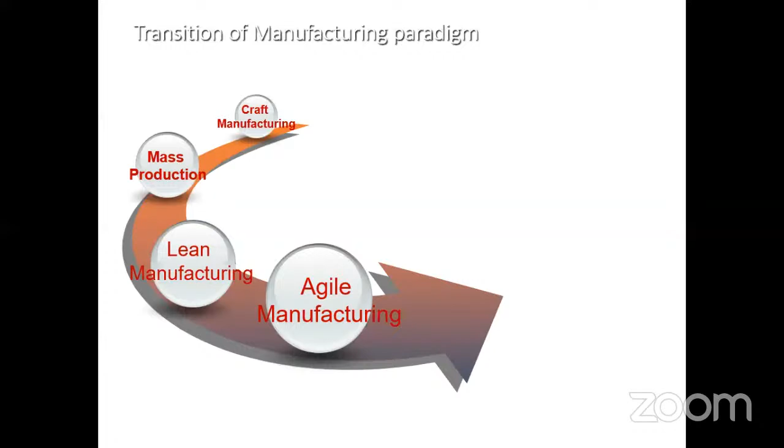Further moving ahead, let us try to see the comparison between a craft system, mass system, and lean system. The focus of the craft system is more on the task or the activity. Whereas moving ahead with mass production, the focus is on manufacturing the product, mass manufacture of similar products. Whereas from a lean perspective, the customer is the focus - customer thought, customer value is more important.

Coming to the operations, most likely in a craft system we don't have more items or more variants. We may operate with limited variants, trying to produce in line with the requirements. But in the mass production system, we have the batch and queue scenario because the products are getting accumulated - it will have a batch and queue scenario.

Next comes the lean system, where the focus is on synchronizing the flow and pull. Synchronizing the flow means the processes have to be synchronized as a part of it - one process and the next process have to be synchronized and streamlined so that the product flow will be smooth. And it is based on pull - the lean system works purely based on customer demand. We try to produce to the customer demand; it's based on the concept of the pull system.

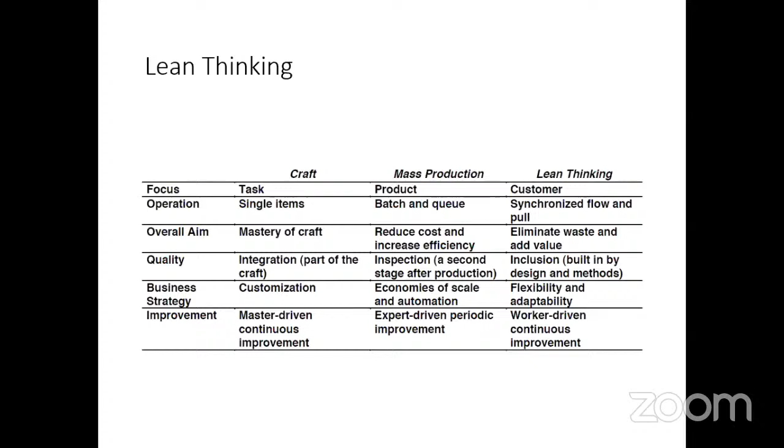Now if you see the industry's concerns, one perspective is government policies, because government policies help us make certain changes. With regard to lean manufacturing, the Ministry of Micro, Small and Medium Enterprises had a policy called the Lean Manufacturing Competitiveness Scheme, LMCS, wherein they provided grants for industries to implement lean manufacturing, even small scale industries. Many small scale industries have adopted it.

We were involved in some cluster-based projects as part of this LMCS, wherein small scale industries as a cluster, maybe 5 to 10 industries, are put together. When they form a cluster, they can submit a proposal to the MSME ministry, and accordingly get a grant. The ministry can provide about 70 to 80% of the project cost, and the remaining 20% the respective industry has to take up. Likewise, government policies are bringing about changes in manufacturing systems.

Next comes global competition, because the competition is at a very large scale, and the intensity of competition is increasing. We have numerous players for the same product, not only at the national level but also globally. We have numerous international players for the products. Next, the organization is accountable to shareholders, financiers, stakeholders, and so on, so that accountability is also very essential.

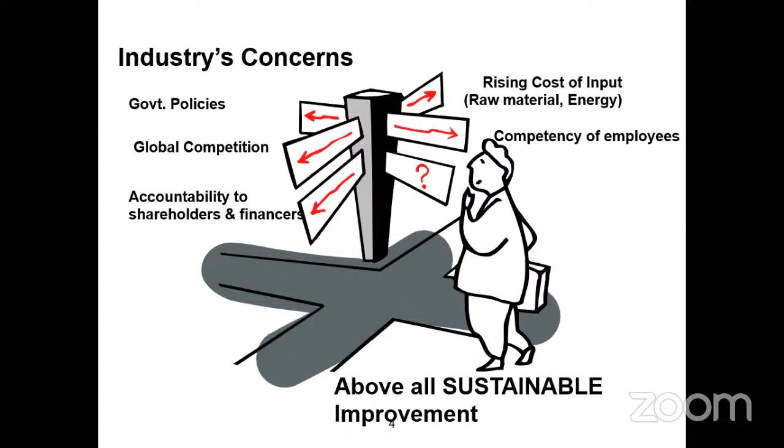Now let us see lean manufacturing. There were experts who gave insights on lean manufacturing, but I would like to provide insights from a different perspective. Lean manufacturing originated from the Japanese Toyota Production System, TPS, also called just-in-time concepts, where the idea is that whenever we receive a customer requirement, manufacturing should happen and the product has to be delivered to the customer on time. That's most important - everything should happen at that particular time. That 'on time' is very essential.

From these systems, the lean manufacturing concept emerged, and it has been applied across diversified sectors and is very relevant to Industry 4.0 systems. As part of Industry 4.0 implementation, we are working with industries on the lean concept. It is more essential because it has traveled from third generation requirements to fourth generation requirements. Tomorrow I have a session where I'll discuss all these things from an Industry 4.0 perspective.

If you see, lean manufacturing is called an integrated manufacturing system, where the focus is to maximize and utilize capacity based on need - without need, the capacity should not be utilized. We should also explore reutilization - for example, auxiliary materials, whether there is scope for reutilization. And we need to control inventory; minimizing and eliminating inventory is very essential.

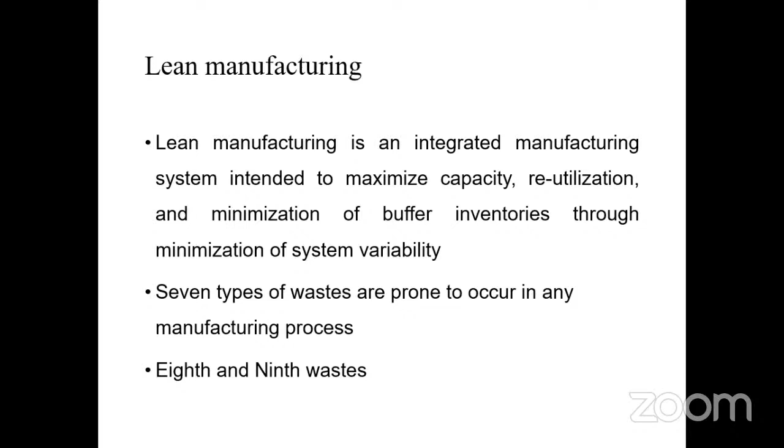The lean theory is based on the elimination of waste, which is called by the Japanese term muda, meaning waste. We need to minimize the waste. As per the lean theory, we have 7 forms of waste, and apart from these, 2 more forms of waste are also included. Anyway, we will discuss those. So these are the 7 forms of waste we need to consider as per the lean theory.

Unnecessary transportation, unnecessary inventory, unwanted motion, waiting for any kind of task, producing more than what is required, processing more than the requirement, and non-conformities or defects. These are the 7 fundamental forms of waste which we are very much concerned about as per the theory of lean manufacturing.

Let us spend some time and discuss the 7 wastes which are very essential from the viewpoint of lean manufacturing. What is transportation waste? Transportation has to happen, but here we mean unnecessary transportation of materials, sub-assemblies, and other entities in the manufacturing layout. Such unwanted or unproductive movement of materials and sub-assemblies accounts for transportation waste.

Next, inventory. Inventory is nothing but the stock of goods. In lean theory, there are 3 forms of inventory: raw material inventory, work in process inventory, and finished goods inventory. Inventory in any form is not desirable, and we need to control it, because if we do not control the inventory, it will impact the lead time. But anyway, we will discuss that in detail. So inventory in any form has to be minimized and eliminated.

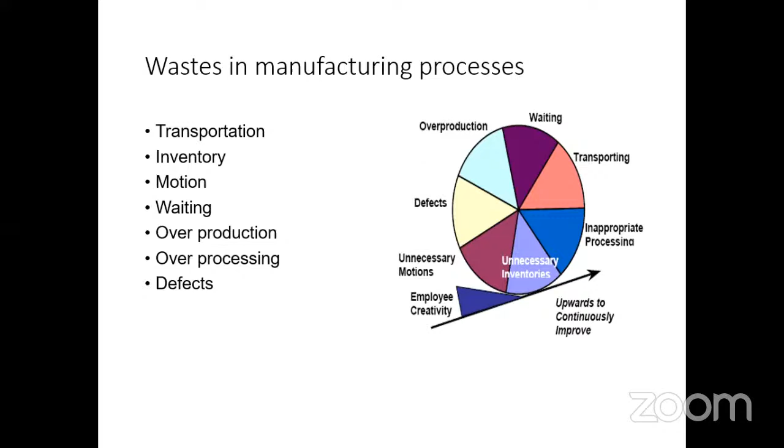Before we move ahead, any questions to this stage with regard to the waste theory and so on? Any questions? Maybe 1 or 2 quick questions we can take. Any questions from participants?

Okay, let me proceed. So as I mentioned, lean is concerned with eliminating the wasteful process steps, and it tries to improve the speed. Improve the speed in the sense that the speed has to be regulated based on customer demand. The system should not go very fast or too slow — it should go at an optimal speed at which the customer has asked for. Also, the capital utilization may be lesser because, from the viewpoint of Industry 3.0, not much technological intervention will be there. So limited technological intervention.

And the idea is that if we try to reduce the process time, we'll be able to bring the product in the time which the customer has asked for. So that's compliance.

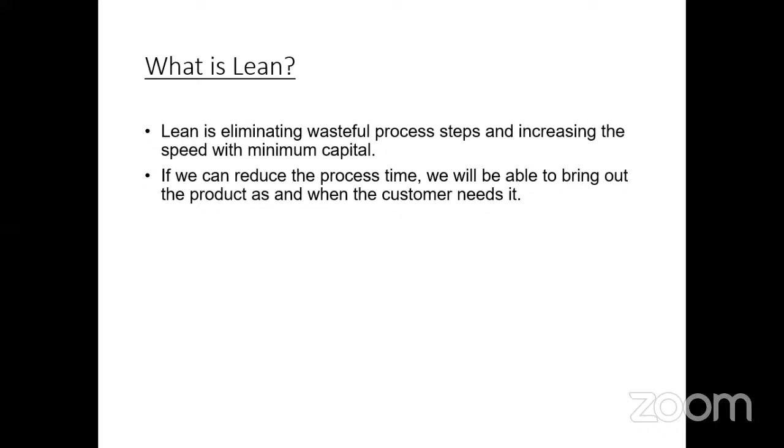Next, we will go ahead discussing further about the term lean and lean manufacturing. So as we discussed, lean is focused on identification of the kind of waste involved in the process, and it is a business philosophy focused on continuous improvement — continuous improvement, Kaizen, it's based on a Kaizen approach. And it tries to improve the process irrespective of the type of the product, whatsoever it may be — automotive, electronics, aerospace, or chemical products. It can be any kind of product. But this philosophy is about facilitating continuous improvement.

And as we mentioned, lean tries to enhance the speed, but it does not produce at a very higher or faster speed, because if we try to produce well ahead of schedule, it will become inventory, either at the manufacturer end or at the customer end, which the customer also will not accept. Here, cost reduction will happen through elimination of waste and through value addition. And as I mentioned, it can be applied to any kind of industry — automotive components, aerospace components, electronics components, chemical processing industry — not only product-based industries, but also process industries and so on.

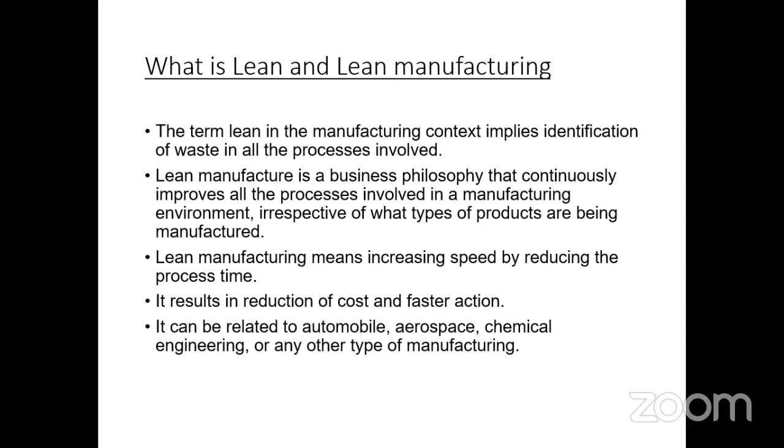So here, in order to understand the lean system, we should have an understanding of its elements, set of tools and techniques, and governing rules that will eliminate waste and create value. In my presentation, I'll be focusing on these three perspectives: the elements, then tools and techniques, and further governing rules.

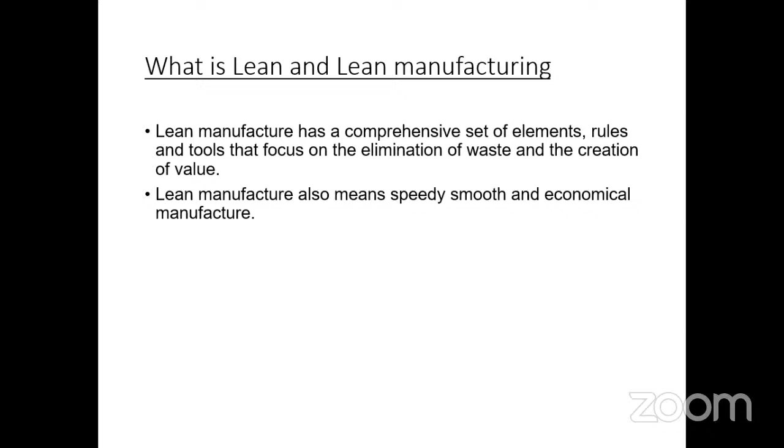Lean manufacturing implies it's a speedy process. Speedy means in line with customer demand - that is most essential. And smooth means we are trying to minimize the fluctuations in the system. And economical manufacturing means we are exploring the perspective for cost reduction and so on.

As we discussed earlier, the term waste is nothing but an entity that consumes resources but does not add value from the customer's perspective. So waste could be in any form, like high inventory or scrap, could be rework or low productivity, downtime, or poor yield, elongated lead time, waiting for inspection, waiting for instructions, and trying to utilize more labor than needed, and so on.

All these could be mapped to the 7 fundamental waste as a part. These are all the different forms of waste which happen in the context of manufacturing.

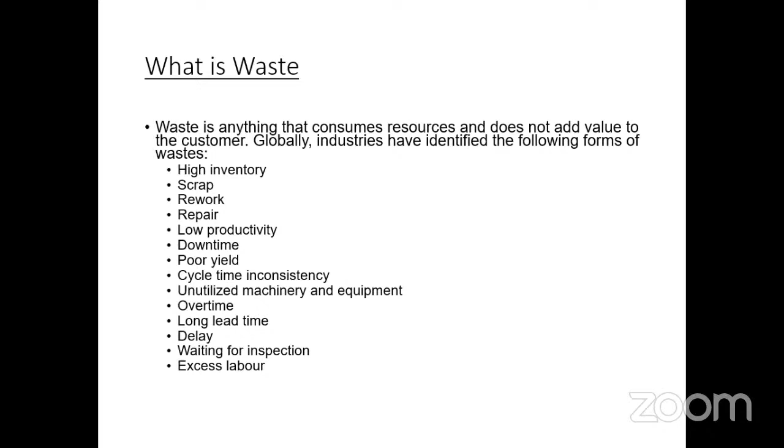As I mentioned, we'll be discussing the elements first. There are 5 elements of lean manufacturing called customer value, value stream, value flow, customer pull, and perfection by continuous improvement. These are the 5 elements, and they are based on a chronology - they are chronologically formulated and have to go by a particular order. Ultimately, these elements can be applied to any kind of process, and it facilitates continuous improvement.

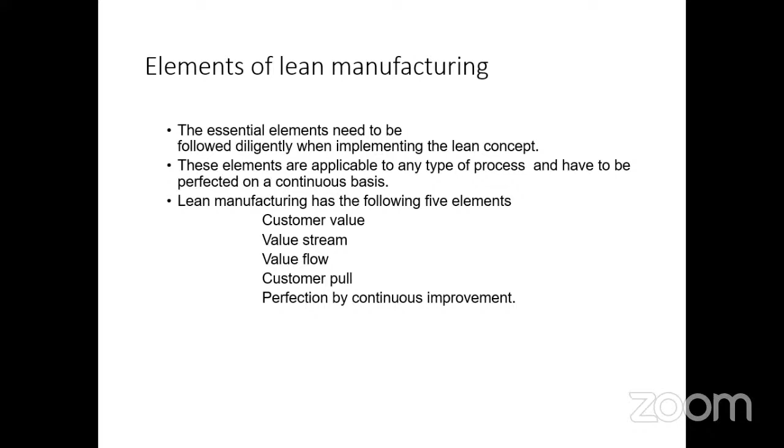So these are the 5 elements, as I mentioned: customer value, value stream, value flow, customer pull, and perfection by continuous improvement. Let us discuss them.

So what is customer value? Here in the context of the lean system, the customer pays money; in turn, they want value. That means we need to focus only on those activities which add value from the customer's perspective - that's more essential. And we need to have a proper understanding of the customer activities. All these are very essential.

Next, having understood customer value, we will define the value stream. Value stream is nothing but the stream of activities which happens in manufacturing from the receipt of the customer requirement till the product is delivered to the customer. It contains various steps, activities, and processes in line with fulfilling customer requirements. Such a sequence of activities is called the value stream.

And in a value stream, if you see, there will be 3 types of activities: value adding activities, second is necessary but non-value adding activities, and the third is non-value adding activities.

What is value adding activities? It's also called customer value adding activities. Say, different manufacturing processes we do - maybe a turning process, milling process, grinding process, and so on. So they are the different process activities we do in order to fulfill the customer requirement. So they are value adding activities.

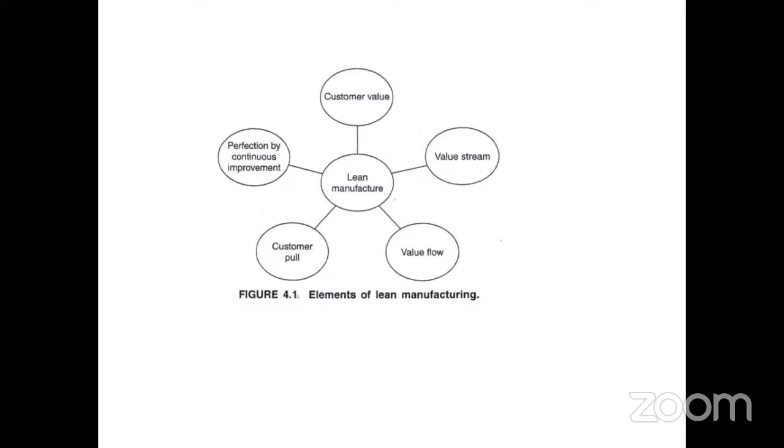Okay, if not, let me proceed. Then interim we'll take up. As we discuss these things, let me take this kind of value stream which I had shown. Let us discuss some examples. So I told there are three types of activities in a value stream.

One is value added, second is business value added, third is your waste or non-value adding activities. As I mentioned, in value adding activities, only those activities which you do in order to fulfill value from the customer's perspective count. For example, I have a product sequence, a process sequence: a turning process followed by a grinding process, and further an inspection and other kinds of processes. Those activities—turning, grinding—are value adding activities.

The inspection, which comes next to grinding, is not adding value, but it is essential for completion of product manufacture. So it's a business value adding, or necessary but non-value adding activity. It is not adding value, but it is essential for completion of the process and product manufacture.

Next come non-value adding activities, which is not at all adding value from customer's perspective as a part of it. So the 7 plus another 2 forms of waste we had seen, they are nothing but the non-value adding activities.

Okay, I will tell 1 or 2 examples now, and you please tell me which category of activities it belongs to. So some kind of waiting which happens for the inspection. Waiting happens for inspection - which form of activity is this? Participants, you can unmute yourselves and react to the question, or reply to the questions.

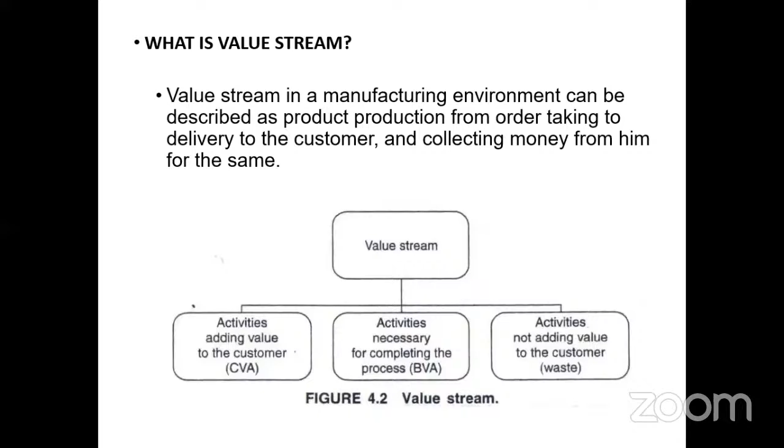Okay, next, as we have discussed about the bottlenecks, everything I conveyed. So now let us see the comparison between a mass system and lean system, because in order to understand the system, we need to benchmark it with its predecessor system.

If you see in mass system, there will be buffers of inventory - raw material inventory will be there, in-process inventory will happen, finished goods inventory will happen, and so on. But in lean production, the objective is to minimize inventory and minimize waste. It is the focus of lean system.

Similarly, if you see in mass production system, in lean we are saying it is just-in-time delivery, that means delivery on time. If we deliver well in advance, customer will not accept because it will become an inventory at the customer end. If we deliver late also, the customer will not accept. On-time delivery only is needed.

Whereas in mass production, it is called just-in-case deliveries. That means early delivery, they may be happy. Sometimes late delivery, for some reasons, the manufacturer will say and the customer will accept. And sometimes it will be just-in-time, on-time delivery also. All these three types of delivery mechanisms may happen in a mass production system.

Similarly, in mass production system, we are doing that quality inspection and all. We will go ahead with the concept of acceptable quality level. We do this kind of statistical process control approaches, like we try to draw an operating characteristic curve and so on, then we try to ensure quality.

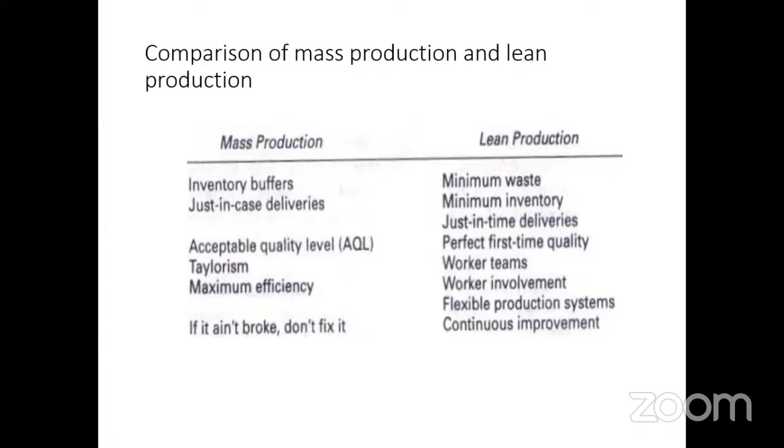Are there any questions with regard to the comparison of mass production with lean production? Are there any clarifications? Okay, let me proceed further. Now, are there any questions? No, sir. Fine, next we will go ahead with the tools and techniques of lean manufacturing.

Having completed the elements, we'll be discussing the tools and techniques - the primary or basic tools, which include 5S, total productive maintenance, value stream mapping, then a set of secondary tools. Primary or basic tools are essential for lean implementation; any lean implementation will start with a primary or basic tool. These include 5S, TPM, process mapping, and value stream mapping.

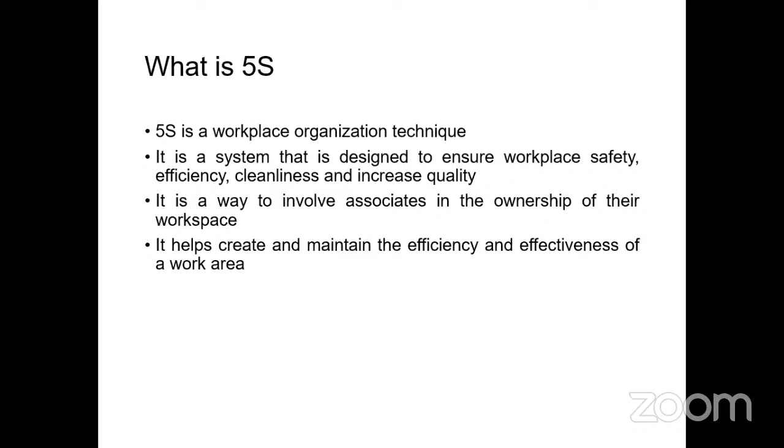What is 5S? 5S is a workplace organization technique that promotes an organized workplace, an organized way of doing things, and an organized layout. Thereby we'll be able to ensure the operators become involved, the workforce becomes involved, and they'll be able to demonstrate their ownership as a part of it. Such a cultural transition we try to bring about with regard to 5S.

So 5S are nothing but five Japanese terms: Seiri, Seiton, Seiso, Seiketsu, and Shitsuke, meaning sorting, setting in order, shine, standardize, and sustain.

What were they? Seiri is nothing but we try to segregate the things which are in use and which are not in use. First we try to identify the items not in use, category-wise. We attach a red tag to those items not in use, then keep the red tagged items in an identified area, then take the disposal action. Like this we proceed.

Next one is Seiton. Here it promotes orderliness. We try to keep the items in a proper sequence so that they can be retrieved for usage. So the sequence we need to ensure as a part of it - that orderliness we try to ensure. It is not only with regard to the shop floor, but also with regard to the supply chain process, the materials procurement process, the quality assurance process, the production process, and so on. In Seiton, we try to use the concept of shadow boards and such, which I'll show some examples of in due course. So Seiton is about ensuring orderliness, putting things in a proper sequence.

Next comes Seiso, which means shine - ready for immediate usage. We try to ensure the workplace and surroundings are clean, so there is no concept of dirt or dust getting accumulated. That's where the focus of shine or Seiso comes. Here in shine, we try to arrive at cleanliness standards, lubrication standards, and a variety of standards we try to deploy, along with routine cleaning, routine inspection, and so on.

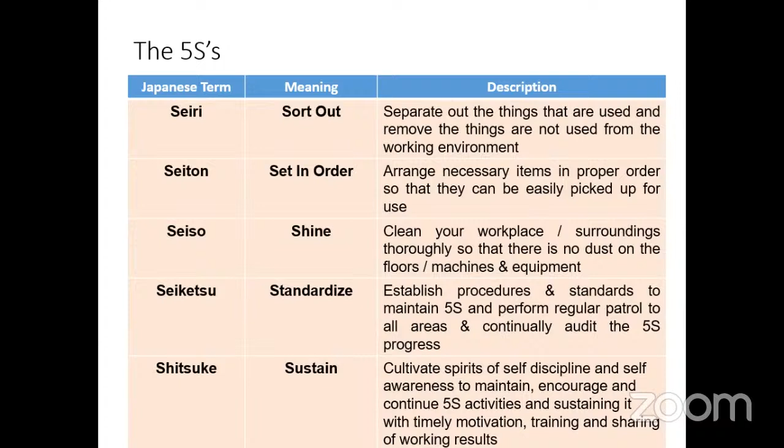Next, as a part of Seiton, we follow this kind of shadow board. On the left, all the tools are dumped in a toolbox. On the right, all the tools are positioned very appropriately. This is the concept of the shadow board - it contains the impression or image of the tool, so the workforce will be able to position the tool in the right place. If the wrong tool is positioned, it will not fit. That's the idea. It may seem like a simple tool, but it is more effective as a part of this. So this is the concept of shadow board, used in Seiton.

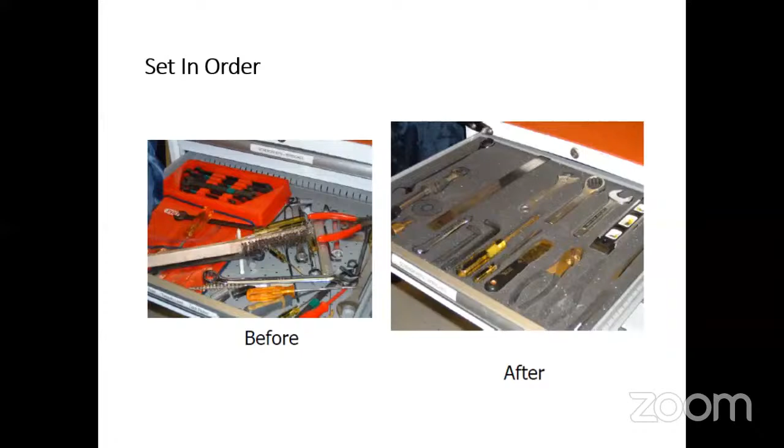As a part of 5S, auditing is nothing but an act of checking - different activities we do with regard to the different elements. As a part of Seiri, whether we create 5S red tags or not, and whether the red tagged items are kept in an identified area or not, we check. And for Seiton, whether we develop the concept of shadow boards and whether shadow boards are in practice - this is an example 5S audit sheet we developed in a project.

With regard to Seiri, we had a checkpoint for materials, machineries, visual controls, and so on. With regard to Seiton, indicators for quantity, location, and then we use a 1 to 5 scale or 1 to 10 scale. Accordingly, we calculate the audit score and try to find out the area where improvements are needed as a part of it.

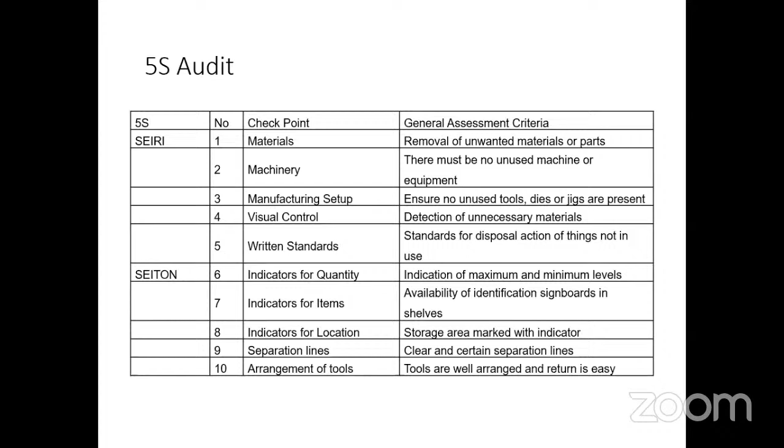As a part of standardization, we develop standard procedures and standard instructions, and we do this audit and represent the audit scores through a spider chart or radar chart. This shows the scores of all 5S elements - in a single shot, we'll know the score pertaining to Seiri, Seiton, Seiso, Seiketsu, and Shitsuke, which one needs improvement, and what actions we need to take. This is what we do as a part of Seiketsu.

So now we've discussed 5S. Any questions with regard to 5S?

Participants, any questions with regard to 5S? Kindly feel free to interact.

Vinod asked whether the 5S concept can be used only for industries or other places too. It is a universal tool, not only for industries but also in day-to-day activities. We can see many real-life examples, say for example maintaining books in a book rack, or maintaining things in household activities, how we position and retrieve them. If we don't keep items in the right place, it takes more time to locate and retrieve them. So it's a very practical and real-life tool with universal applications.

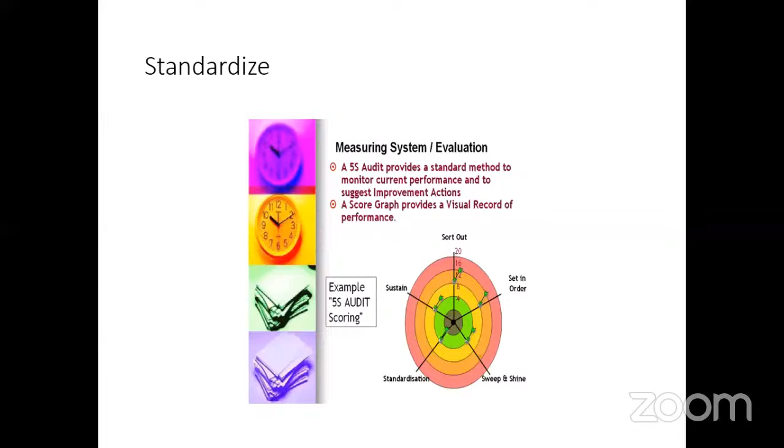Since this is my thesis area, how do we convert intangible benefits into tangible benefits? Yes sir. Thank you sir. Fine, let me proceed with the next.

Dr. Anand asked whether any specific training program is available for 5S auditor training. There are some organizations who provide training with regard to this implementation, but we can't say this auditing is similar to regular audit training, so for that specific training we don't have it. But as part of 5S implementation, some kind of training will be given by the agencies.

Any further questions? Yes, please go ahead. A participant asked if any organization in India has implemented this and seen success, could you throw light on that. Your voice is breaking, ma'am, could you please repeat?

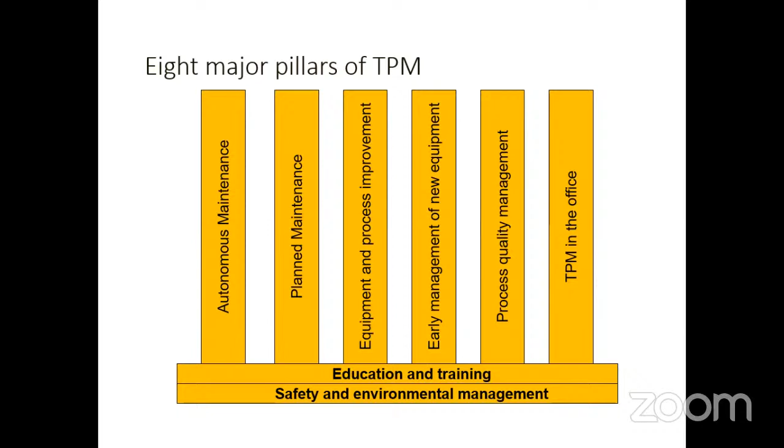Next, as I mentioned, the overall equipment effectiveness is the comprehensive performance measure for maintenance practices. It is the combination of availability, performance efficiency, and quality. When we take the product of availability, performance efficiency, and quality, we'll be able to get overall equipment effectiveness, which indicates the efficiency of the machinery or equipment during its planned loading cum operating time.

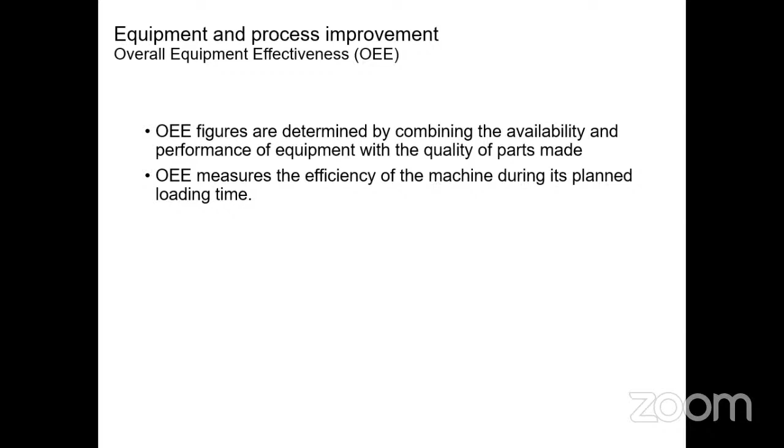Let us see the equation used to calculate overall equipment effectiveness, which is the product of availability, performance, and quality. For availability, the machinery or equipment has to be made available, meaning we have to minimize the downtime related loss. We already discussed the different sources of downtime that we need to minimize. The availability of machinery and equipment needs to be taken care of.

Next comes performance, where we try to minimize the speed loss. Once we ensure the performance of machinery and equipment is fine, that means the planned production and the actual production will be on par with each other. Actual production should be in line with planned production. That we need to take care of.

Next comes quality yield, where the defects or quality loss need to be minimized. Then accordingly, the quality yield that we have can be ensured.

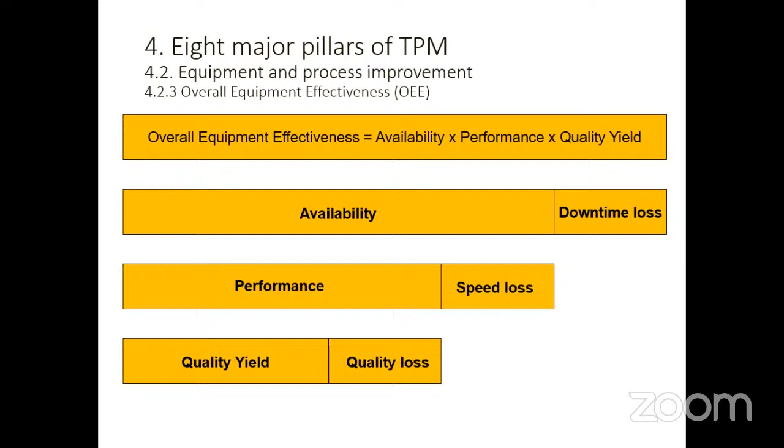As per world-class threshold, overall equipment effectiveness has to be of the order of 85%. If it is more than 85%, it is considered the world-class threshold. Organizations have to calculate OEE for all machineries and equipment, and they need to find out where the OEE is less, and analyze those machineries or equipments as a part of it.

Let us see one more illustration for overall equipment effectiveness. Before that, let's look at some conditions which can help in TPM success. It includes, first, equipment effectiveness - how to enhance equipment effectiveness. Next, how we can implement autonomous maintenance. Third is scheduled maintenance. Fourth, skills improvement. Fifth, equipment management. We will discuss one by one.

What is equipment effectiveness? Equipment effectiveness is nothing but, as we discussed, the OEE of machineries and equipments has to be as per the world-class threshold. That means we need to analyze the problems with availability, performance efficiency, and quality as a part of it, and accordingly ensure equipment effectiveness.

Next comes autonomous maintenance, but before that, let me show an illustration for equipment effectiveness. Here, OEE is being calculated for a machine tool, a drilling and tapping center. The shift time is 8 hours, 480 minutes. In that, planned maintenance time is 25 minutes, downtime is 35 minutes, and setup time is 30 minutes. When we subtract this maintenance time, downtime, and setup time from shift time, we get available time as 390 minutes, that is 480 minus 90 equals 390. Availability is the ratio of available time to shift time: 390 to 480 gives us 81.25% as availability.

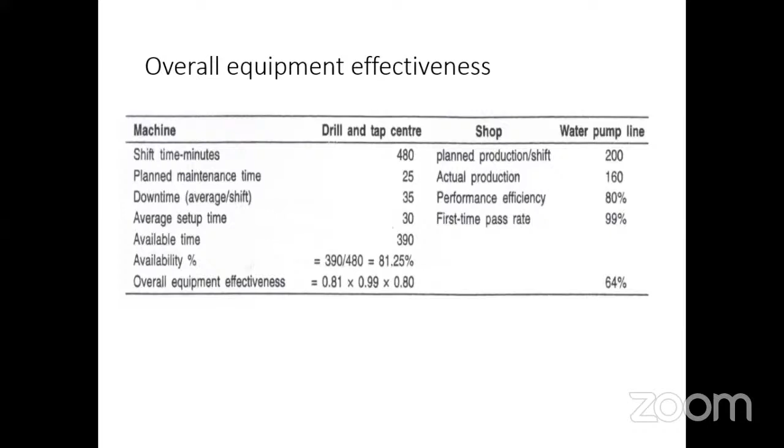Next, as I mentioned in the conditions, is autonomous maintenance. This means operators have to do the maintenance activities on their own. They have to be trained on basic maintenance activities.

Next is scheduled maintenance. We have planned maintenance, and likewise scheduled maintenance is also very essential - daily, weekly, monthly, and annual maintenance. Along with planned preventive maintenance, we have to do scheduled maintenance as a part of it, because it depends on the type of product.

For bicycles, we try to clean them sometimes every day or once a week. Then we apply proper oil, maybe once a month. Similarly, take the case of a two-wheeler - daily we may try to clean it, and weekly we may check the air pressure. Maybe once in 3 months or once in 6 months, depending on kilometers traveled, we check the oil level and other aspects. Likewise, there are daily, monthly, and annual maintenance activities needed, and this is equally applicable for machineries and equipment.

Next comes skills improvement. Here both operational skills and maintenance skills need to be taken care of as part of it, so we need to provide both technical training and communication-based training.

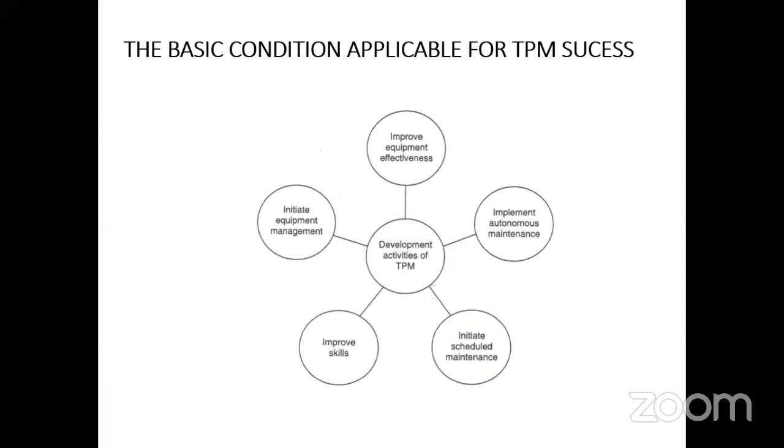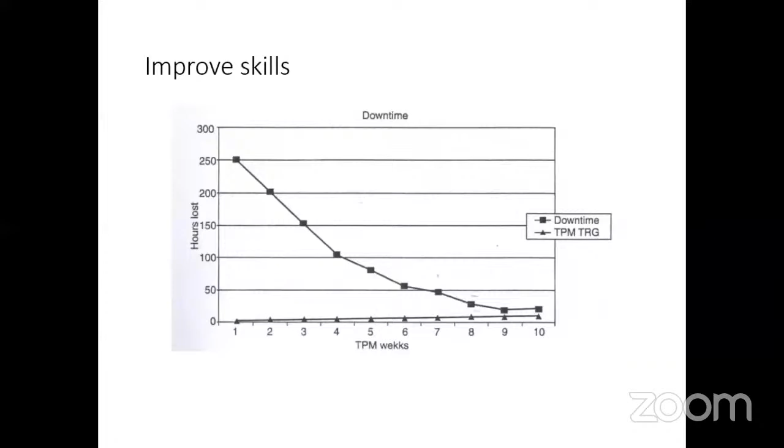So these are all the conditions applicable for TPM success. If you see from this illustration, as a result of training the workforce on TPM, downtime is getting reduced. So we have to train properly as part of it.

Now I would like to provide some practical perspectives for these 8 pillars. For example, autonomous maintenance - we have to involve the operators in all basic maintenance tasks. And quality maintenance - we need to focus on certain improvement projects to deal with quality issues.

I think someone - participants, please mute. All unmuted, please mute.

On quality maintenance, some quality improvement projects have to be prioritized and we need to address the quality aspect. In TPM in office, the administrative activities with regard to TPM need to be taken care of. Then safety, health and environmental management - we need to take care of safety-related risks and the work environment has to be enhanced. Likewise, we need to go ahead with the practical perspectives with regard to the 8 pillars.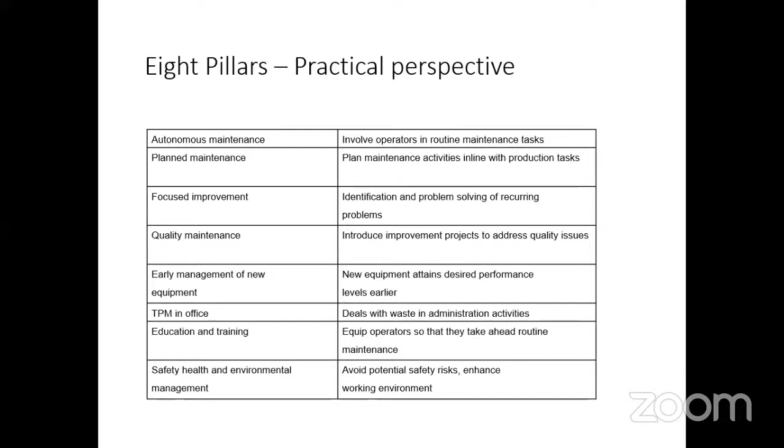Okay, so now having completed TPM, we will move ahead with value stream mapping. Before that, are there any clarifications on TPM, participants?

Are there any queries with regard to TPM?

Any questions? I think one question was posted in the chat box regarding 5S. How far is 5S realized in Indian industry? Meaning, to what extent?

5S is one of the primary tools of lean manufacturing. I'll answer this question by citing the example of TVS.

I would also like to add a point. I visited Tata Motors, in fact I visit every year to update my own knowledge as a management faculty. They say that implementation of 5S is not at all possible 100% in Indian circumstances.

There may be claims that we have achieved 5S, but actually it's not the same. I agree with your point from a practical perspective. But even without implementing TPM or using the term lean manufacturing, this organized way of doing activities had been existing for a long time in industries. After implementing lean manufacturing, the term 5S was brought into the picture for these activities.

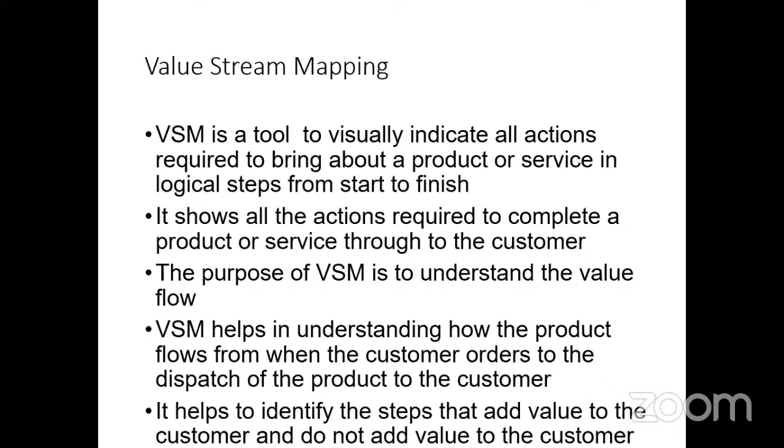As part of the elements, we discussed the terms value stream and value flow. Value stream is nothing but the sequence of activities happening, where at every stage we ensure cost is incurred and value is added. This value stream map will help us understand the value flow and identify which activities are adding value and which are not, from the customer's perspective.

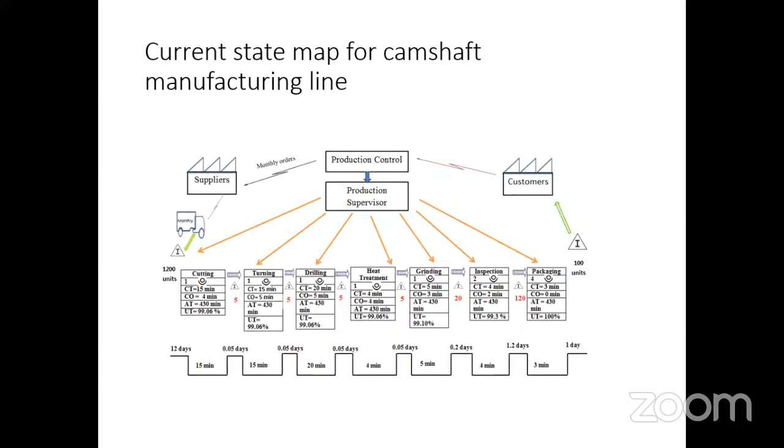Uptime is calculated by subtracting the changeover time from the available time, then taking the ratio to available time. For every process, we measure the cycle time and changeover time, and calculate the available time and uptime. The number of operators, process name, and so on are also represented. So let me go to the textbook-based example.

So the inventory of 22 days is very big. Why we convert inventory to time scale is that it helps us understand the magnitude of inventory, and it helps us calculate the lead time more effectively as part of it.

So now let us analyze this value stream. Once we have the current state value stream map, we need to identify which activities are adding value and which are not adding value. We need to analyze this as part of it.

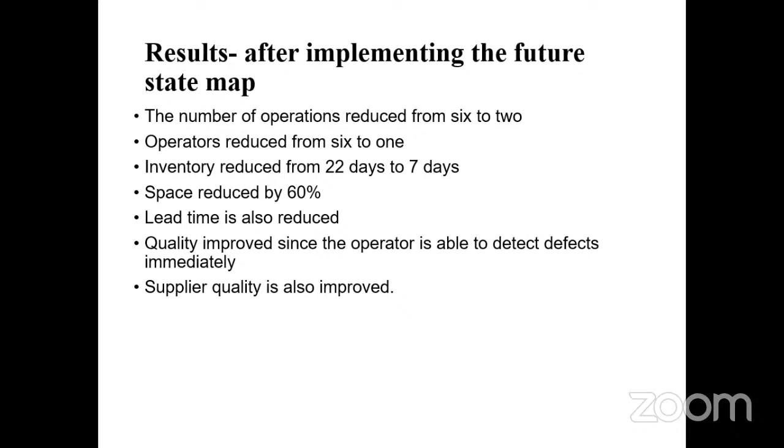So here, a very important thing is that in value stream mapping, we have to be very clear with the data parameters. Some of the data parameters are observation-based, say for example shift time. It's observation data. Number of operators, what are all the processes - they are observation-based data.

Then we have some measurement parameters. Say, cycle time we have to measure, changeover time we have to measure. They are all measurement parameters. And inventory we have to measure between the processes.

Next, there are computation-based parameters. For example, we have available time we have to compute, uptime we have to compute, takt time we need to compute, lead time we need to compute. Likewise, we'll be able to do it.

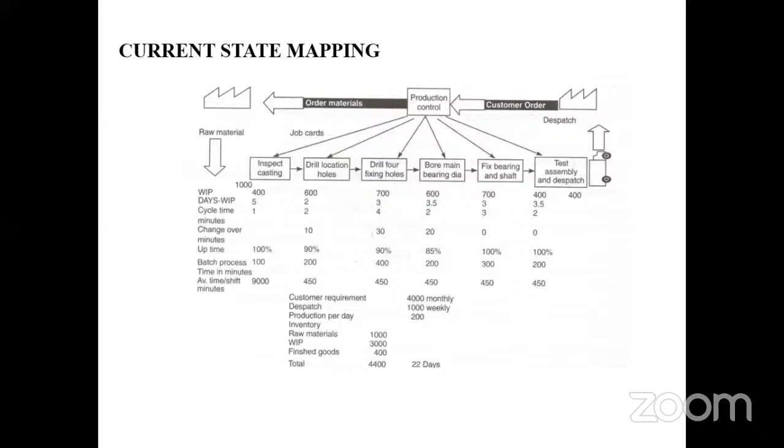So if you see in the value stream map, once we sum up all individual process cycle times and the changeover time, we'll be able to get the total lead time as a part of it. That also we can analyze. So there are observation-based parameters, measurement-based parameters, and computation-based parameters.

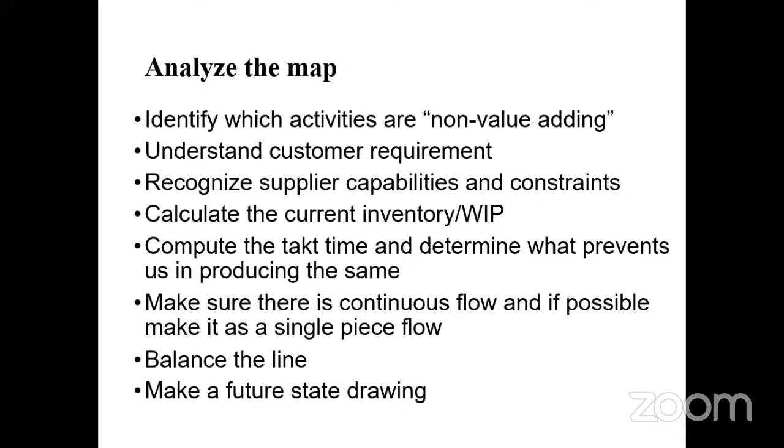So there are two types of mapping: current state and future state mapping. I have shown what all perspectives we need to analyze. Once we draw a current state map, we have to analyze from all these perspectives, and then arrive at the future state map. The future state map is a prediction as a part of it.

This is nothing but a textbook-based illustration I have shown. But I have a few case studies also, maybe 2 case studies, which I can cover in tomorrow's lecture. With the permission of organizers, these 2 case studies I'll be able to include in tomorrow's presentation, since we have another 5 minutes to devote for discussion.

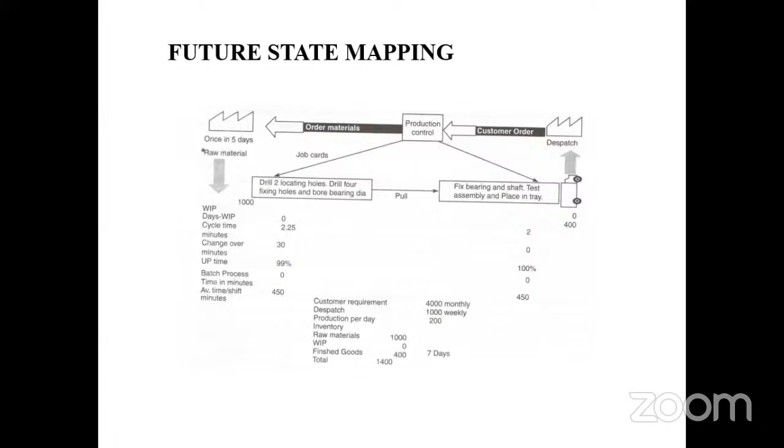Any case studies related to our day-to-day life, maybe student life, that kind of mapping of activities? Yes, sir, it's a very real-life tool which can be used for any real-life applications. Because students, during their 4 years of engineering education, have to map their aim and find out how they're traveling during the course period, and what is the outcome. So that may be mapped, no? Definitely, sir.